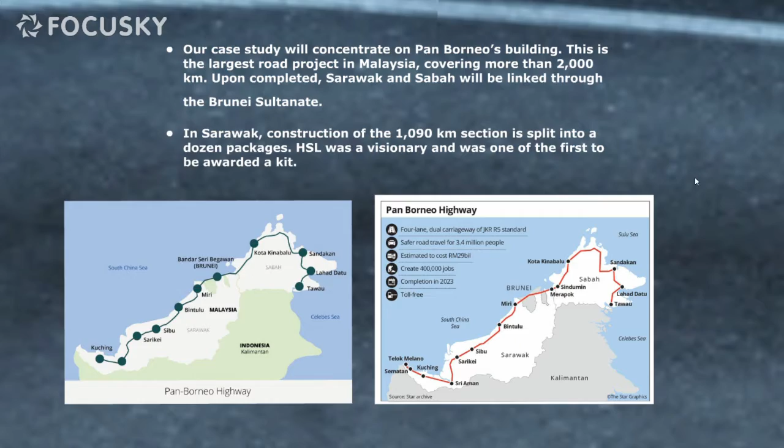The first planning aspect of road and highway construction is financing. Demand for safer, better performing, less congested highways has been created by the growth of the motor vehicle industry and subsequent economic growth. In the past, the growth of trade, educational institutions, housing, and defense has largely drawn on government budget, rendering public highway funding a challenge. The multi-purpose feature of highways, the economic climate, and the development in technology for highway pricing are continuously evolving.

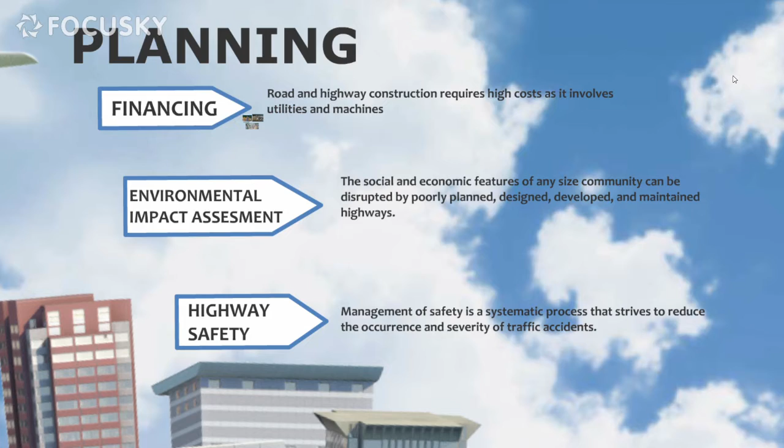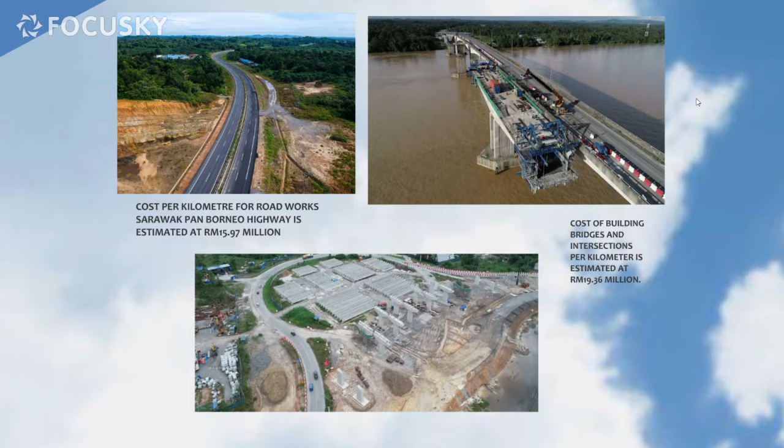The cost per kilometer for road works on the Sarawak Pan-Borneo Highway is estimated at 15.97 million ringgit Malaysia, covering all relocation of utilities and road equipment. The inclusive cost of building bridges and intersections per kilometer is estimated at around 19.36 million ringgit.

Second is environmental impact assessment. The social and economic fabric of any size community can be disrupted by poorly designed, developed, and maintained highways. Common adverse effects of highway construction include habitat and biodiversity damage, air and water pollution, and the degradation of the social-cultural structure of a community. The highway system must be designed and maintained at a high level and standard.

There are three primary measures for incorporating environmental consideration. This approach is known as EIA. First is identification of the full range of possible impacts on the natural and socio-economic environment. Second, evaluation and quantification of these impacts. Third, formulation of measures to avoid, mitigate, and compensate for the anticipated impact.

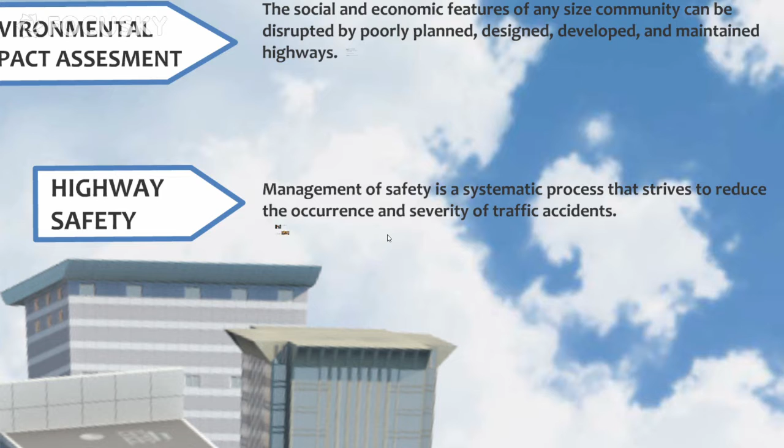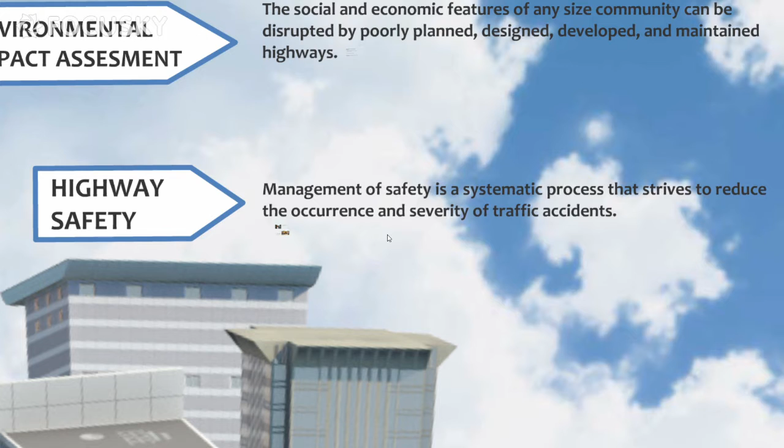Third is highway safety. Management of safety is a systematic process that strives to reduce the occurrence and severity of traffic accidents. The man-machine interaction with the road traffic system is unstable and poses a challenge to highway safety management. The key to increasing the safety of the highway system is to design, build, and maintain them to be far more tolerant of the average range of this man-machine interaction with highways.

Technological advancements in highway engineering have improved the design, construction, and maintenance methods used over the years. These advancements have allowed for new highway safety innovations, by ensuring all situations and opportunities are identified, considered, and implemented as appropriate. They can be evaluated in every phase of highway planning, design, construction, maintenance, and operation to increase the safety of our highway system.

During the construction of Pan Borneo, traffic remained heavy on the existing trunk road, which is the only land infrastructure connecting all of Sarawak's rural settlements to towns and cities. This is uninterrupted 24/7 across all sections. HSL has a team of almost 50 traffic safety officers stationed across 70 kilometers, including the bridge. The officers can also be spotted with their personal safety equipment, wearing high visibility vests while using batons and signage to signal motorists about the road diversion.

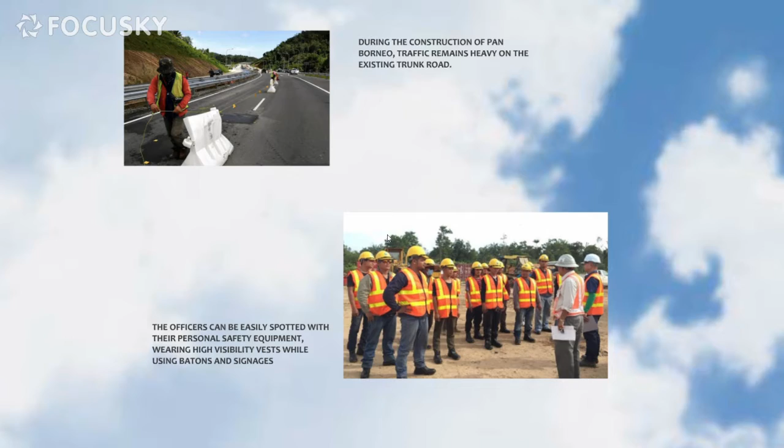The first process of road and highway construction is setting out. This is carried out by following the dimensions specified in the layout drawing. A commonly used setting out procedure is the profile board method. A series of boards that show the exact level 1 meter above the complete construction level are placed at intervals along the proposed line of the road. A profile board with a fixed height, called a traveler, is used for controlling the excavated level between the profile boards.

By placing the traveler in the sight line between two level boards, it can be seen whether or not the excavation has been carried out to correct level, and adjusted accordingly.

The level of each profile board is controlled using a line level, which is a short spirit level hung from a nylon string. The operator moves the string up or down until the bubble is centered. Junctions, hammerheads, turning bays, and intersection curves are laid out in a similar manner.

Second is earthwork. Earthwork is one of the major works involved in road construction. It involves the removal of topsoil along with any vegetation before scraping and grading the area to the finished formation level. This is usually done by tractor, shovel, grader, or bulldozer.

Below the formation level, the soil is known as the subgrade. It is essential that the strength of the subgrade is tested prior to earthwork beginning.

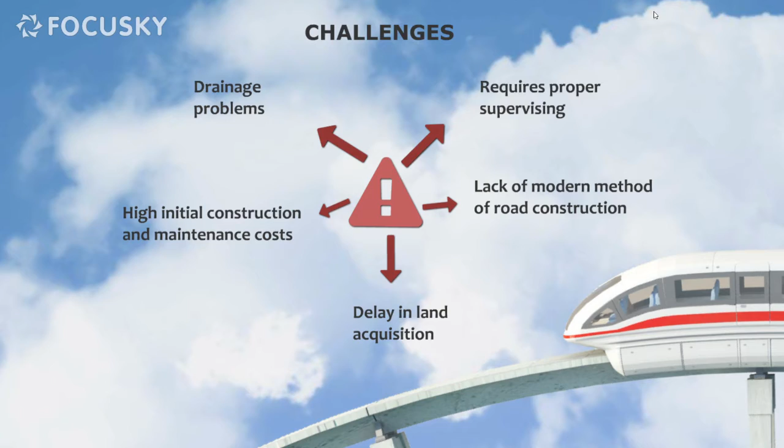Moving to the next point: maintenance. There are three main types of road maintenance. First, emergency road maintenance. Second, reactive road maintenance. And lastly, preventive road maintenance.

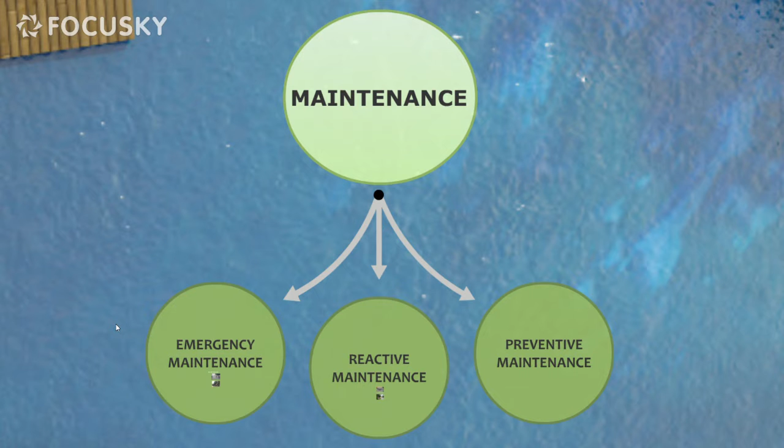Emergency maintenance is always unplanned and disruptive. Emergencies are life-threatening, and even though they do not happen often, municipalities need to have a contingency plan for when they occur. Usually it is a simple act of nature that creates the need for an emergency repair, such as heavy rain that can cause a mudslide.

For reactive road maintenance, this is a category of maintenance that involves fixing issues after they occur. The local authority will repair it if they get complaints from the public. The most common one is patching potholes. So the authorities need to check and repair as soon as possible because it affects the safety of users.

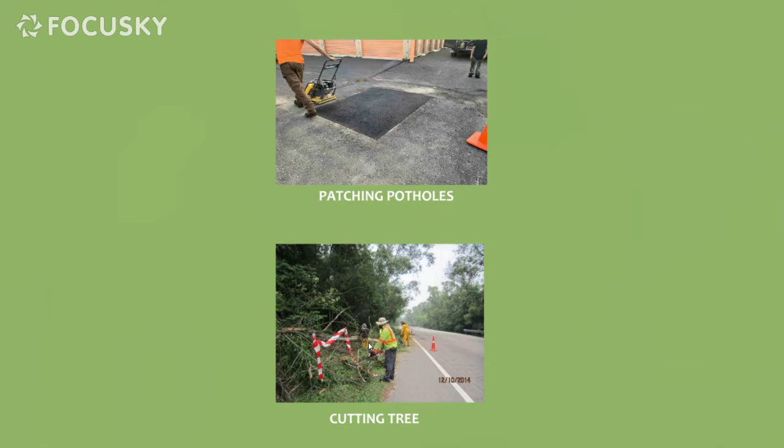Lastly, preventive maintenance. Regular inspection, timely road life extension treatments, and routine maintenance can keep streets from crumbling under wear and tear, and help steer away from more severe problems, such as repairing crack sealing and chip sealing.

During the maintenance work, contractors are responsible for maintaining the free flow of traffic on these sections of the existing road. Temporary diversions shall be constructed wherever the site is intersected by existing roads, footpaths, cycle tracks, or access to properties. The contractor also needs to install and maintain adequate temporary construction signs in accordance with the subsection by Jabatan Kerja Raya (JKR).

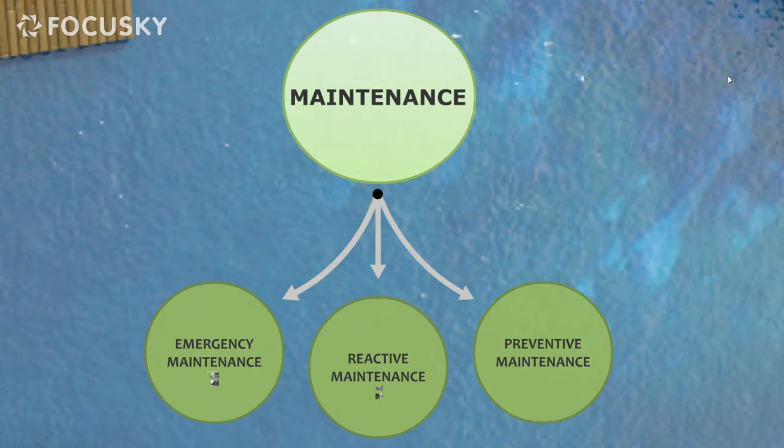I'd like to draw attention to the standards in road and highway construction. The authorities have created several acts and standards in road and highway construction in order to create uniformity in the design. This can also produce smooth, safe and reliable traffic movement, and lastly, to assist engineers in designing the engineering details of the road section.

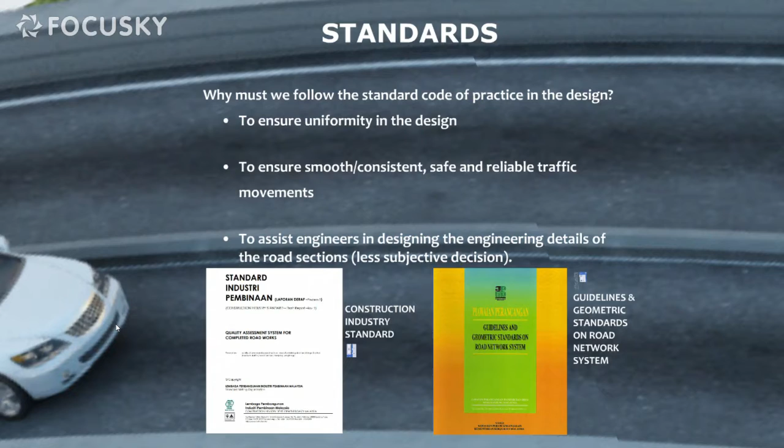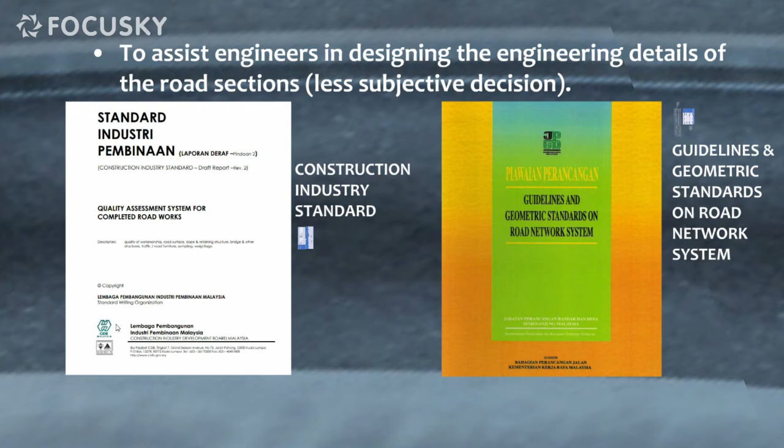Based on the study, I found that two sources are often used as a reference in the construction of roads and highways: Construction Industry Standard, and Guidelines and Geometric Standards on a Road Network System. Construction industry standards explain a lot about the elements and components of road that need to be built and maintained according to the standard. Examples of elements and components can be seen in this table.

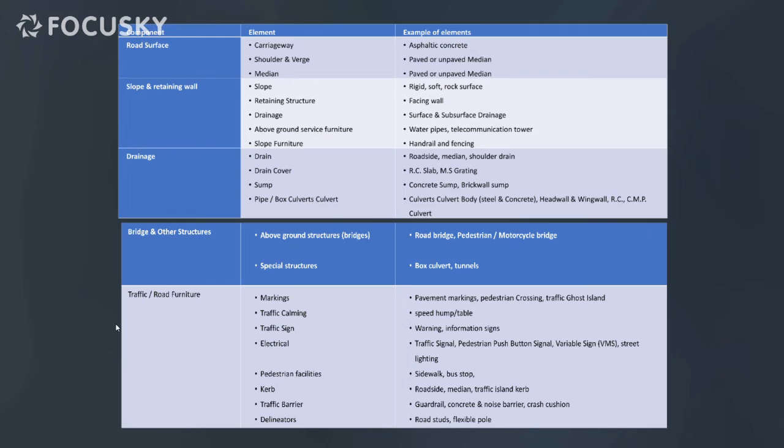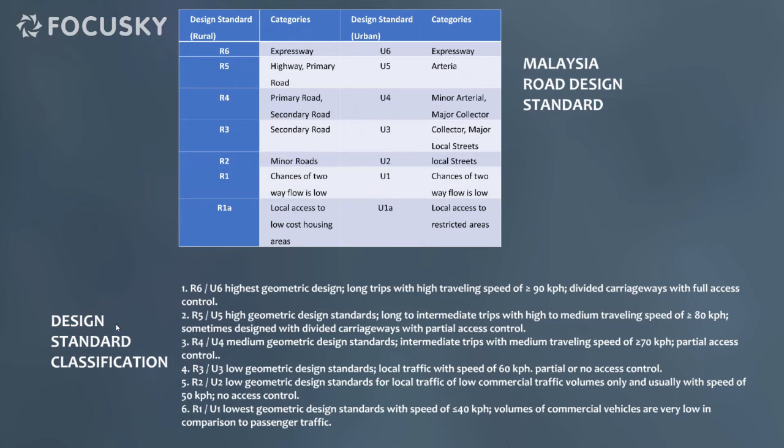The guidelines and geometric standards on road network system explain a lot about Malaysia's road design standard and design specification. For example, one thing emphasized is that the quality of road construction depends on the use of the road. If the road is a highway, then the quality of the road that needs to be built is high, due to the long road distance and vehicles traveling at high speed.

Safety standard for highway and construction site: the Occupational Safety and Health Administration developed standards to improve workplace safety and health. Part 1926 addresses safety concerns for construction sites, specifically the use of danger signs, caution signs, exit signs, directional signs, and traffic signs. The following requirements are only a few examples.

First, construction sites should be posted with legible traffic signs at points of hazard. Second, all traffic control signs or devices used for the protection of construction workers shall conform to standards set by the Manual on Uniform Traffic Control Devices.

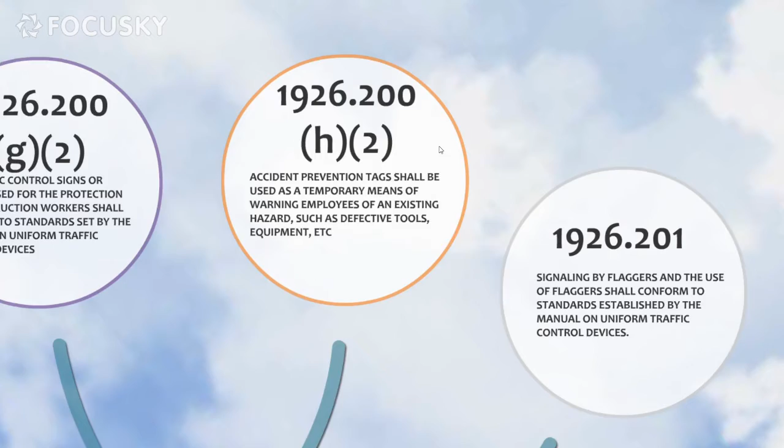Third, accident prevention tags shall be used as a temporary means of warning employees of an existing hazard, such as defective tools, equipment, etc. The last one: signaling by flaggers, and the use of flaggers shall conform to standards established by the Manual on Uniform Traffic Control Devices.

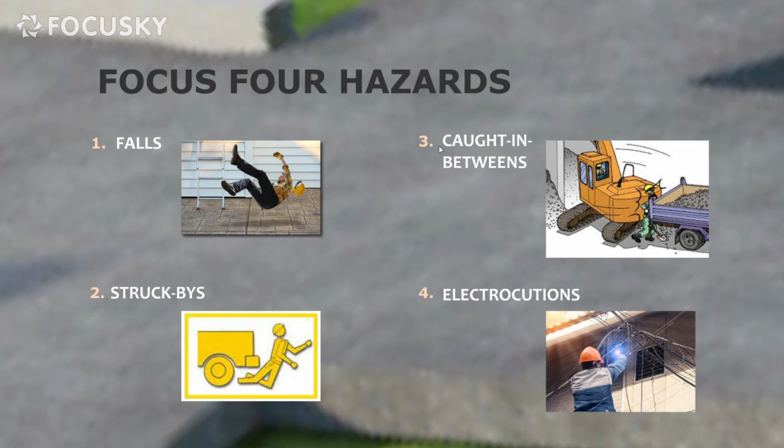According to the Associated General Contractors of America Highway Workers Safety Program, there are four basic hazards known as the Focus 4 hazard. These include falls due to improperly constructed surfaces and unprotected edges; struck-by due to vehicle strikes and falling or flying objects; caught-in-between due to rotating equipment and unguarded parts; and electrocution due to contact with utility lines and live circuits.

Given the danger of roadside construction work, it's vital to know how to stay safe while working on a highway. Consider the following safety tips to protect yourself from work zone injuries.

First, high visibility clothing. Wear high visibility clothes, armbands, hats and vests, preferably fluorescent or reflective.

Second, be observant. Be sure to look before you shift your position, and pay attention to all potential hazards, particularly blind spots for moving construction equipment.

Third, beware of work site vehicles. Understand channel lanes where walking is prohibited and where vehicles enter and exit the work site. Remain aware of any traffic in and out of the work site.

Flaggers should be particularly aware when it comes to understanding traffic flow and work zone setup, and ensure traffic channeling devices are properly placed.

Use spotters to look out for danger when loading and unloading equipment from vehicles. If you are a spotter, know the best place to stand and confirm what hand gestures mean.

Understand communication signals. Understand all communication signals used between equipment operators and workers on foot.

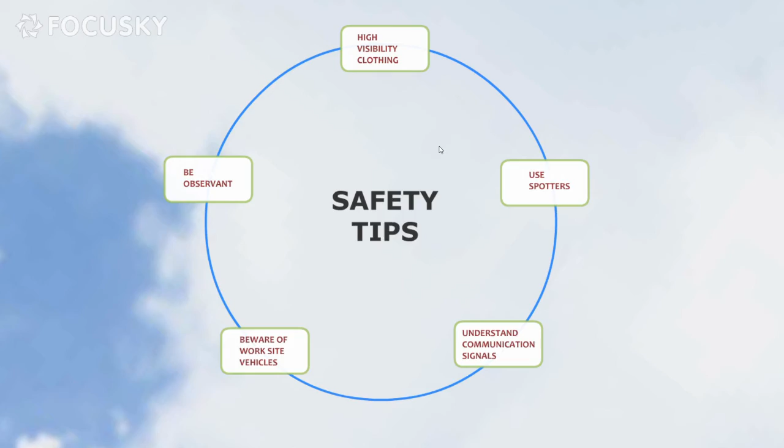Wear appropriate personal protective equipment (PPE). OSHA standards provide criteria for personal protective equipment, including protection for the head, feet, eyes, face, hearing and respiration.

It could be the last defense between a worker and a possible injury. However, many injuries occur not because employees don't have protective gear, but because they choose not to wear it. This means employers not only need to provide the PPE, but must require employees to always use it.

Safety and health precautions for road construction work at night. First, traffic management plan. The contractor is responsible for ensuring any activity involving a public road has an approved drawing of the traffic management plan and a valid work permit from the local government authority before commencing any road closure.

Such as warning signs, portable changeable message signs (PCMS), and flashing arrow signs (FAS).

Second, traffic cones and cylinders. The aim is to guide approaching vehicles gradually into a lane passing the works by means of an approach taper, and to ensure the driver can readily judge the limits of the carriageway throughout the length of the work.

Third, temporary barriers for delineation. These may be used as an alternative to traffic cones and cylinders to separate high traffic roads or highways from the work area of roadworks.